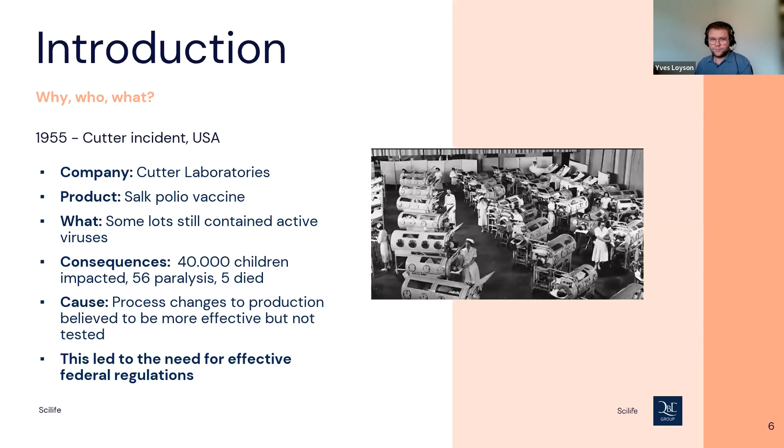What we learn here is that quality control, which is sometimes the outcome of qualification and validation, should be well rationalized, and the maintenance plan is also very important. It's not really a part of qualification, but it will be checked during the IQ phase of our validation approach that the maintenance plan is in place.

If we have a closer look at why we do qualification and validation, we do it to be sure about a more positive qualitative outcome for our products, to reduce the amount of discrepancies, and, maybe interesting as well, it will reduce the cost of production and manufacturing.

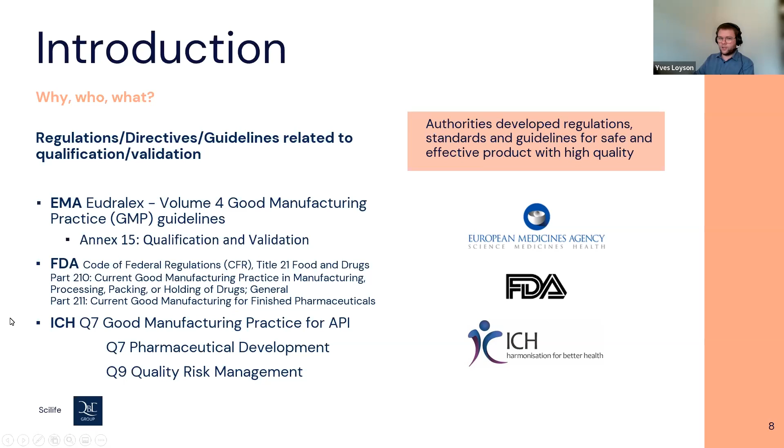When we have a closer look at the definitions given by the EMA, and later by the ICH guidelines, there will be a lot of similarities. For qualification, the EMA states that qualification of equipment, facilities, utilities, and systems should consider all stages from initial development of the user requirements through the end of use of the equipment, facility, and so on.

So qualification is really a life cycle approach. We have to requalify it every couple of times, and even at the end, when you retire an equipment, facility, or system, you have to include some steps like end calibration, good documentation, putting the documents into the archive, and so on.

The definition of process validation, according to the EMA, is documented evidence that the process, operated within established parameters, can perform effectively and reproducibly to produce a medicinal product. So here, once again, process validation is a life cycle approach, and it will be documented that all tests are passed and all rationales are documented, because what is not written down didn't happen.

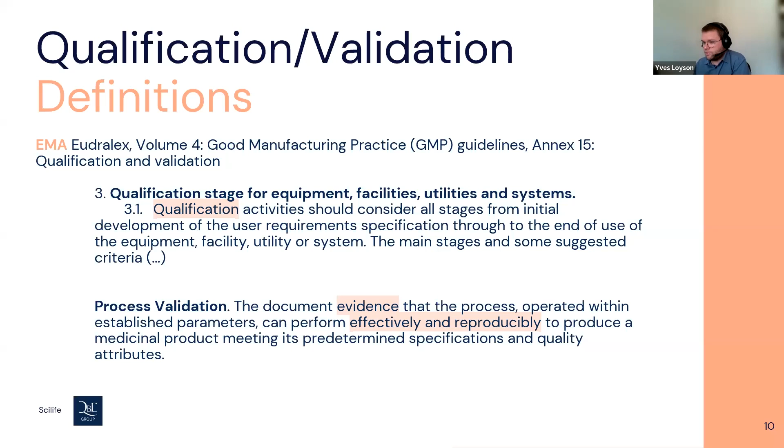The ICH Q7, one of the guidelines of the International Conference on Harmonization, says that qualification is the action of proving and documenting that equipment or ancillary systems are properly installed, work correctly, and actually lead to the expected results. So here, once again, documenting is a very important step, and we have to test all qualification and validation steps against predefined acceptance criteria, according to the expected result.

If we take a larger system, like a filling line, for instance, we can qualify washers, the drying heat tunnels, and the filling lines. But the qualification of every separate part will not conclude in a complete validation. So qualification is a part of validation, but it does not constitute the whole process validation.

The last definition of today: validation according to the ICH is a documented program that provides a high degree of assurance that a specific process, method, or system will consistently produce a result meeting predetermined acceptance criteria. Once more, documentation is very important. The acceptance criteria have to be predetermined based on knowledge and risk assessments.

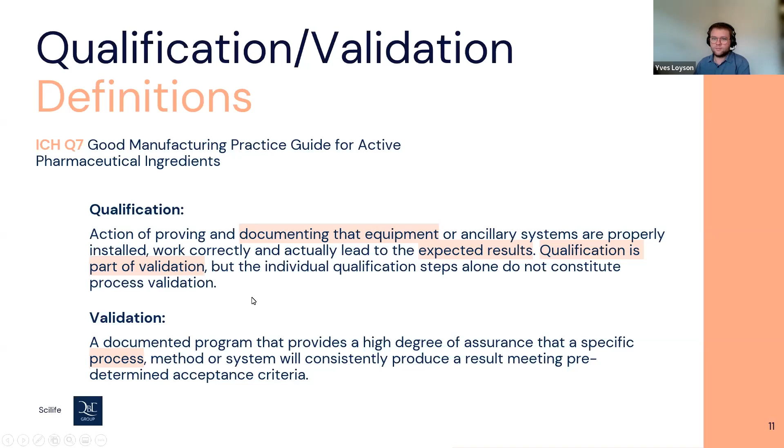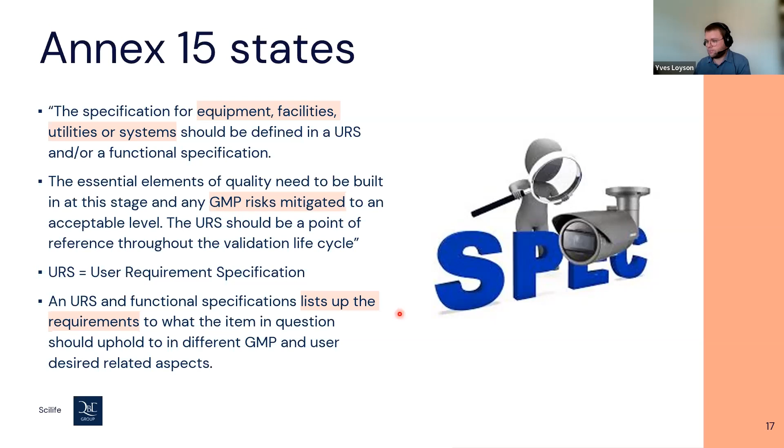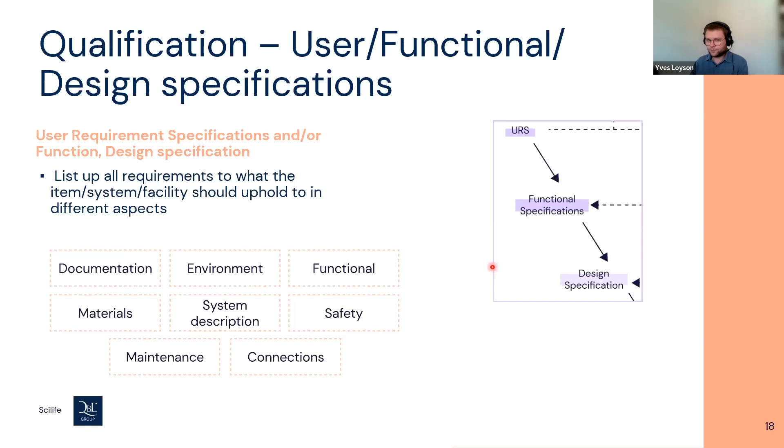If you write the URS, like said, we have to make the distinction between the GXP and the user desired specifications. We can add as well some other, maybe business controlled requirements, some ASH requirements to the URS. You can be free in that. When something is addressed as GXP, so it's really necessary for the legislations, but as well for the good functionality of your equipment, of your site, these requirements shall be tested in the qualification phase, so during the IQ, OQ, and PQ. The other requirements which are listed are not necessary to be tested during the IQ, OQ, and PQ phase, but will be tested during the commissioning phase.

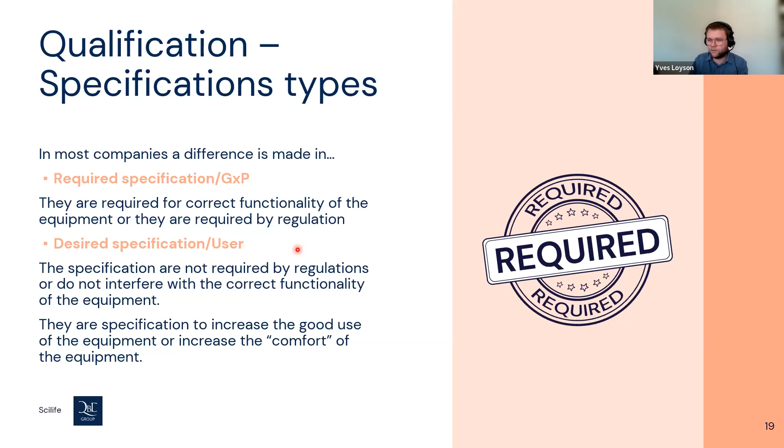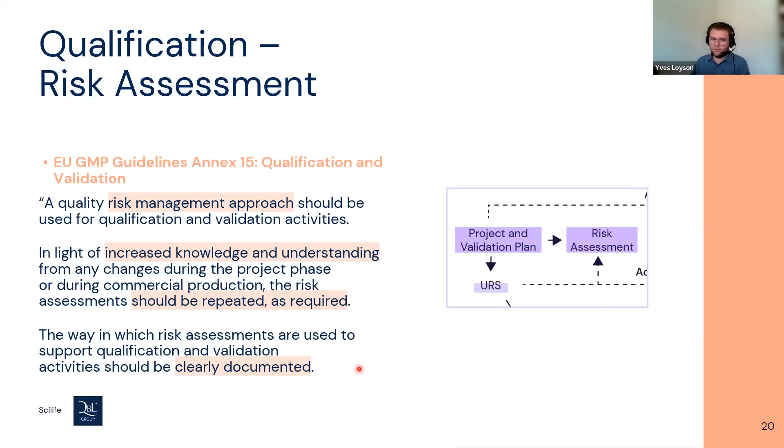Overall, we're going a bit back in the V model. That's once again in the top left corner. The whole V model is based on the risk assessment. So it's a risk assessment, which means it's a living document. In the beginning of the project or your equipment, maybe you don't have all the knowledge with it, but you can perform a risk assessment, of course. After a couple of years, your knowledge is increased and you have to redo the risk assessment. Maybe based on that risk assessment, you have to add a couple of new specifications in your URS, or maybe remove some. Like everything, it should be clearly documented.

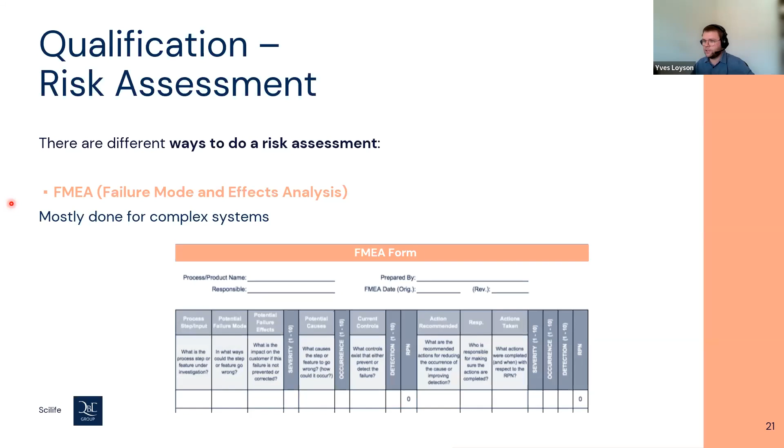We have a couple of ways to perform a risk assessment. The FMEA is one for a complex system, where we address every possible failure with probability, severity, and detectability. Another way to split up your system is the system level impact assessment and the component level impact assessment.

Based on a couple of questions, we will assess the whole system if it's GXP critical, and if you have a GXP critical system, that system can be broken down into several components, and there's a list of questions for a component level impact assessment as well. Those components can be assessed as well if they are GXP critical within the system, yes or no. The GXP critical systems will be included and involved in the whole qualification program.

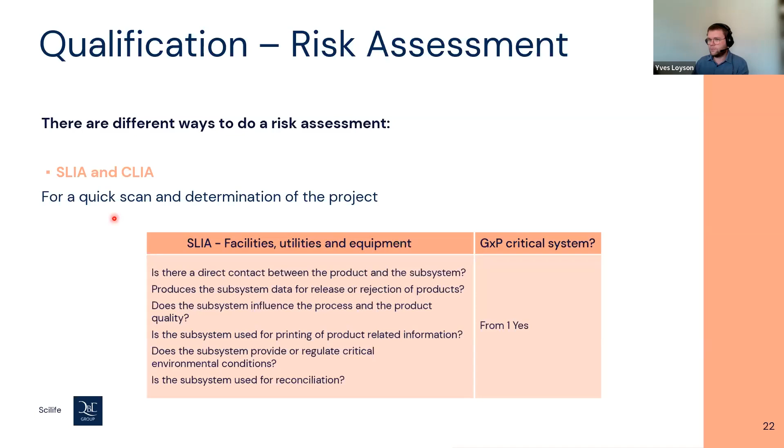Please be aware, if there is a change in your equipment or even a big change in the site, you have to revise your impact assessment or risk assessment. And it can have an impact on the URS, and it can have an impact on the qualification tests which were performed in the past and which will be performed in the future.

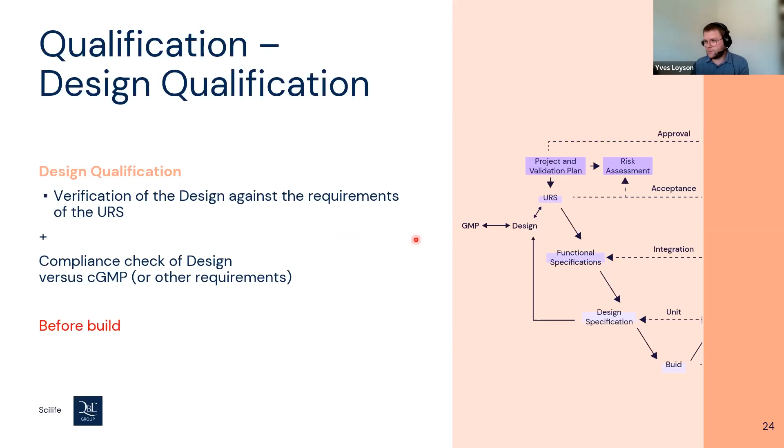As conclusion of the left part of the V model, so the planning and design part, be aware the equipment or the system that we want to purchase is not yet built. We can perform a design qualification. During the design qualification, we will check the design which is supplied by the vendor towards the URS that we've created and towards all the GMP or other legislations. Afterwards, after this design qualification, we can state, okay, this is the required design and we can build the equipment. Is this always necessary to do? I think for the most complex systems, yes, but for a simple off-the-shelf system, it's not necessary.

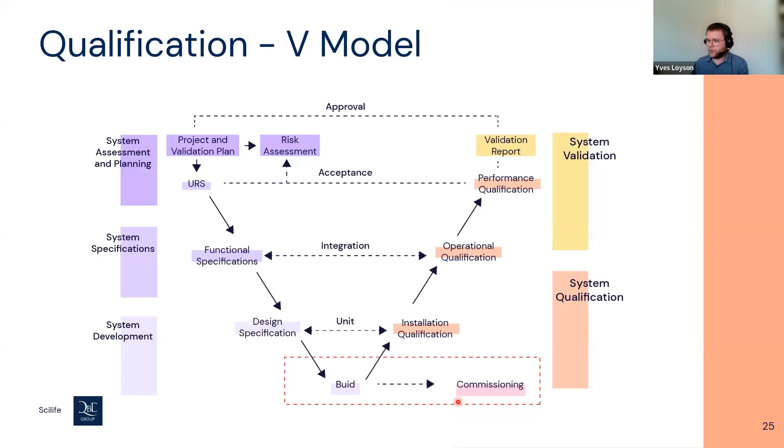The second part of the V model is at the bottom of the V, where the equipment is built and where we will execute some commissioning phases. The commissioning can exist out of two phases. We have the factory acceptance test, the FAT, and the site acceptance test, the SAT. The factory acceptance test is executed at the supplier, and it's documented evidence that the equipment will function as it is ordered. You will test the GXP requirements, but you will test as well all the user requirements as is.

Afterwards, if this is accepted, they will move the equipment to your site, your company, and a site acceptance test can be performed. Some tests can be leveraged between the factory acceptance test and the site acceptance test. If you know that transport will not have an impact on that, or maybe it's a documentation check, you can just leverage the result of that. So we have the factory acceptance test for critical and non-critical requirements at the supplier site, and the site acceptance test on the site of your company.

Maybe important: during the FAT and SAT stage, the deviations or failures that you see and evaluate do not necessarily lead to deviation or change control. That's for the next phase, during the qualification stage. However, it will when you see it's such a big error that you have to rewrite or change your URS. If you change the URS, always make sure it's rationalized as well.

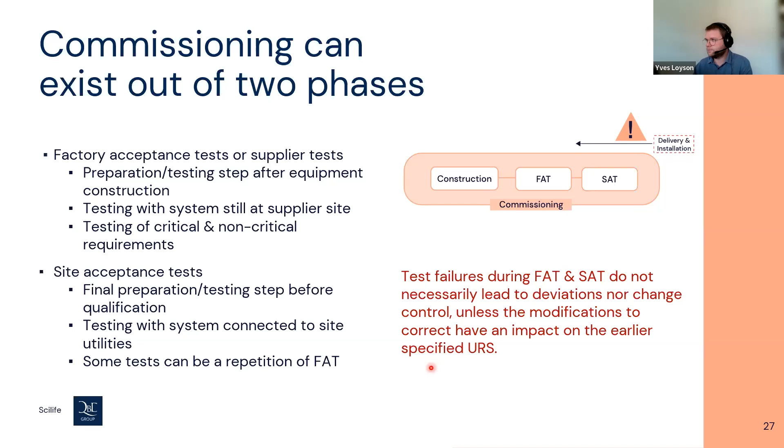For the commissioning phase, we have a little slide now. The Annex 15 of the EMEA states that for complex technology it can be required, so it's not a must-have. And it should be done before the qualification phase and the installation. Like I said, a FAT can be executed at the supplier and can be followed by a SAT on the site itself. Maybe you can leverage some results from the FAT and the SAT into the next phase, like the IQ and OQ phase. But please be aware that if this is the case, it should be well documented, and you should be sure that it's not affected by the transport and installation on the site.

So if you want to leverage some FAT or SAT tests, it's a good practice to include it already in a validation plan, to make an evaluation of all tests which are performed and write it up front in the plan of your validation program, saying, okay, we will perform this test in the FAT or this test in the SAT. And if these tests are passed, they will not be impacted by installation and transport and can be used during the IQ and OQ phase of the qualification. I would write it down in the IQ and OQ as well and put it in attachment so QA can see during the review of the IQ and OQ reports that everything is fine and according to the wishes.

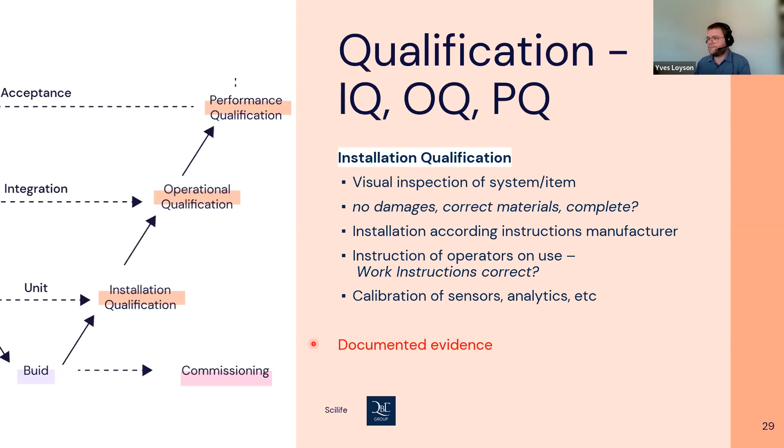Afterwards, after installation qualification, we can go to the operational qualification. In operational qualification, we can already put the power on the equipment and we'll test each function or system, each item of the system, that it works correctly within the specifications. So if you have a vessel with a mixer head inside, does the mixer turn at the specified settings? Okay, you can check that. You can do it at the minimum setting, at the maximum settings, somewhere in between, and cover the whole range.

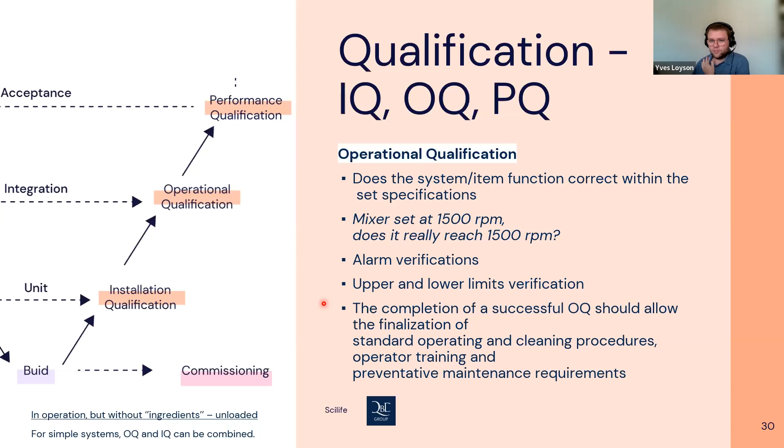We should check as well the alarm verification. So will it trigger an alarm if the parameter is outside its settings? And this can be done for the whole equipment. So during the operational qualification, we want to check actually that the system functions as it is designed within the whole range. It should be documented as well, so we have to write a protocol before OQ. It can be combined with the IQ if wanted, but you should write a protocol before executing the tests.

The last step in the V-model qualification is the performance qualification. So actually, here we will check the reproducibility. We will check it a couple of times with ingredients, with a load and the operation settings. So not the whole range of the equipment, but we'll use the operation settings for this one. Normally, the PQ should be started after successful IQ and OQ. It could be in parallel, but it should be rationalized.

It's good that you have a release note for the IQ, OQ to start PQ, where you rationalize, okay, we did the installation and operational qualification with this and this deficiency or error, but this will have no impact on the further continuation of the performance qualification. So we can continue. So it can be done after the IOQ phase when they're still not completely passed.

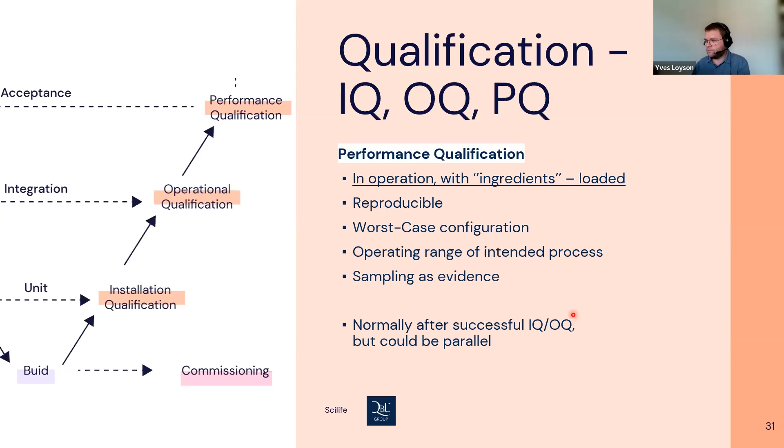At the whole end, we have a validation report. We have written for every stage a protocol. We executed the tests. We gathered the results. All tests have passed if we're lucky. If there are some failures, we have to write down in the report what the failures are, write down the discrepancies, the actions that we have taken. We do the tests to conclude that the validation is completed and successful. So the validation report has to summarize all tests, all acceptance criteria, all test results, and if any deviation occurred, a full investigation has to be applied.

Additionally, it's a good practice, but not obligatory. Between the different stages like IQ, OQ, and PQ, it's good practice to write down intermediate reports to state, okay, we've performed the tests, and we can go to the next phase. Issues that do not hinder the start of the next phase can be taken into the next phase, like maybe a documentation check which failed. You can go on to the next phase without that documentation check, and you can check it properly in the next phase as well.

At the end, a final report has to be written for all validations and qualifications which are performed, like if you have a whole qualification program, and every system has its own qualification report. We will have to write a summary of all qualifications which are done in the project, and in that summary we'll have the conclusion that all results are okay and that qualification was completed.

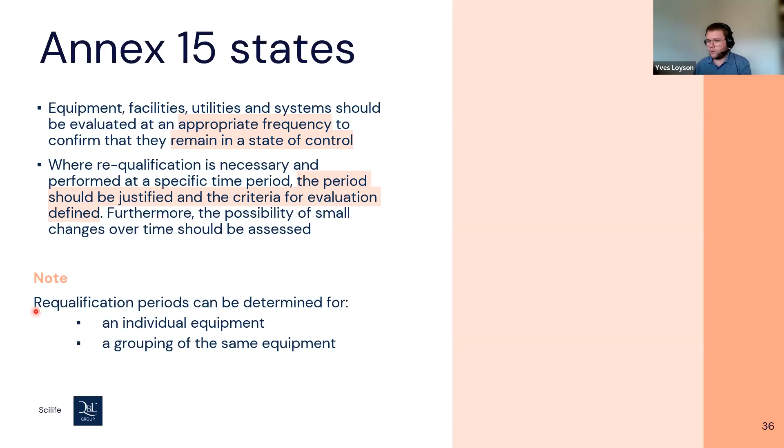At what periods do we have to perform the requalification? Normally, like in the past, a lot of people only did the requalification once a year, but actually, like a lot of things, it's risk-based.

We have to be aware of the consequences of the equipment or process that we use. For sterility or sterile processes, you can do a media fill every half a year to decrease the risk of the outcome. So based on the severity and the potential of failure, you can assess it and state that for this type of equipment, we'll do the requalification once a year, more times a year, or even only once every 2-3 years.

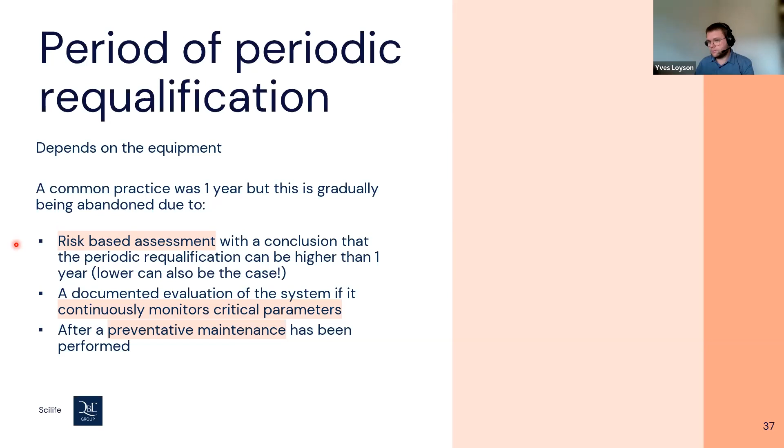Does the whole entire qualification need to be repeated? Like I said, it's not the case. Please be sure, though, that if a big change appears on the equipment or the system, it will have to go through change control and be assessed, and maybe a new qualification of the entire system must be performed, not only a requalification.

That was it about the V model and the qualification. We have a couple of minutes left, and I will go through process validation. As we saw in the definitions of the ICH, we can qualify every system separately, but the qualification will not lead to validation of the whole process or whole system on its own.

It can be seen here in the little timeline. First we have design, development, qualification, and afterwards, after all qualifications, we can perform the process validation. So the qualification is linked to the equipment. For me, process validation is linked to the process, the system, and will be tested on the product.

Some definitions about process validation: it's once again very documented evidence that the process will be effectively and reproducibly produce its medicinal product towards the predefined acceptance criteria and quality attributes.

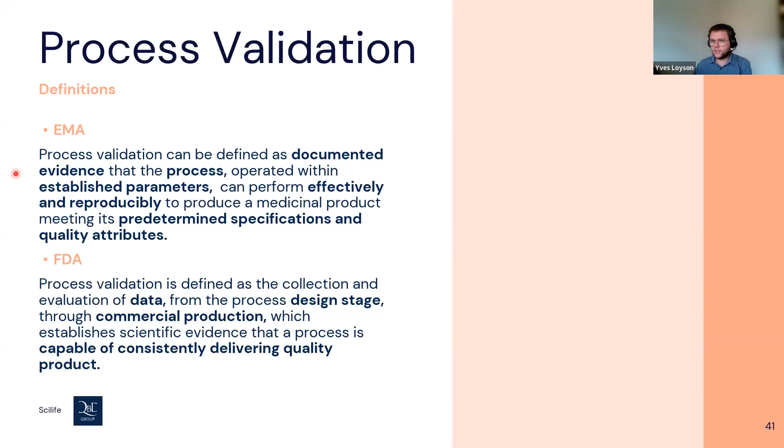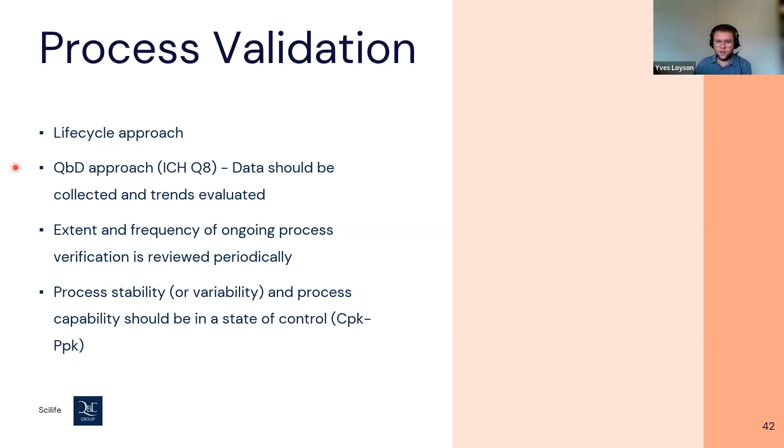So yeah, it's a life cycle approach. You can use the QbD approach, so a lot of data should be collected for that. The manufacturer process is no longer a black box - we know in detail what is happening during the process, and we know for every parameter what impact it will have on the outcome of the process as well.

If we have a little look at the approach which can be followed during qualification, I referred more to the EMA Annex 15 for process validation. I can also refer to the FDA guidance on process validation, written in 2011. There they defined 3 stages: first the process design, then the real process qualification, and afterwards, after the process is validated, we need a continued process verification step as well.

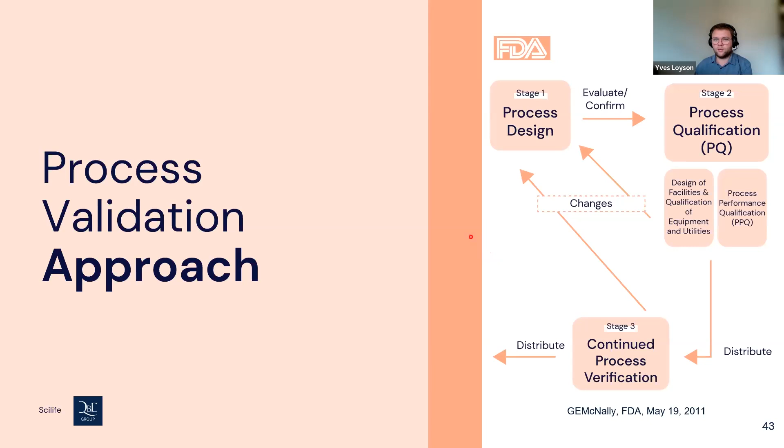During the process design, we want to really understand the process which is happening, and we want to create and set all limits of all parameters and all CQAs that have to be tested during qualification, but as well during release, and maybe continued process verification in stage 3 of the process validation step.

After the system or process is fixed, we can perform stage 2, the process qualification step. In stage 2, we have two parts. First of all, we check the prerequisites - is the whole facility, all the equipment qualified, all trainings performed, all processes and procedures in place? Do we have method validation? Is computer system validation fine, and so on? So we have to check all prerequisites.

And afterwards, we will perform the PPQ tests, the process performance qualification, where we will repeatedly run a number of batches to prove that the normal operating ranges consistently produce the product that we want.

At the end, in stage 3, there's continued process verification. Between stage 2 and stage 3, the process is fixed and validated, approved by the authorities, and it's on the market, so it's in routine. Even then, we have to add more controls and evaluate all the results during the continued process verification stage. We have to write a process control strategy for that, so every batch during routine can be checked once more.

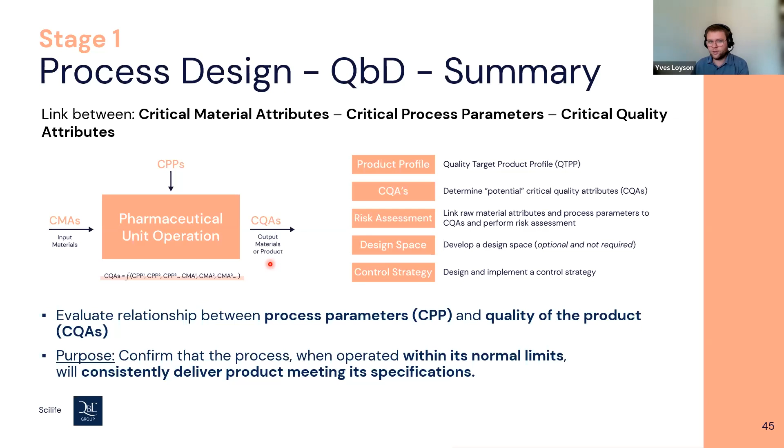In stage 2, like I said, we have 2 parts. First, check the prerequisites and do the qualification of equipment, systems, and utilities. In the second part, we can perform the qualification of the whole process and prove that our process is within control.

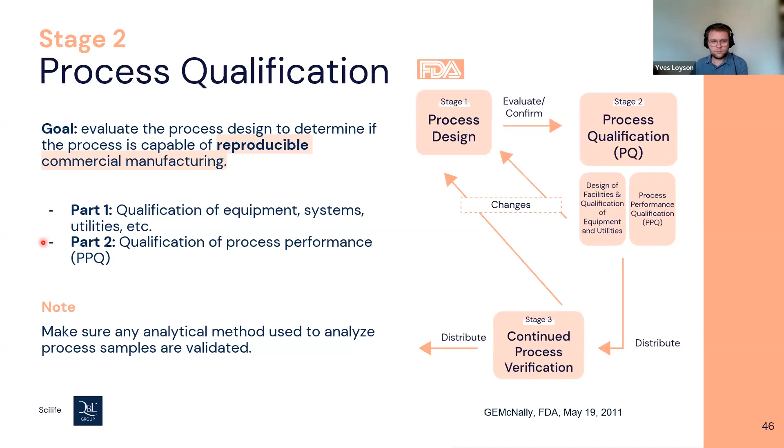Like we said, and saw in the definitions, it's documented evidence that we have to create. So like in qualification, where we had to write a protocol every time, even here during process validation, we need a protocol, a plan of how to do it, and the links between each step. The protocol will include all the parameters listed, state which sampling is needed, and define the acceptance criteria.

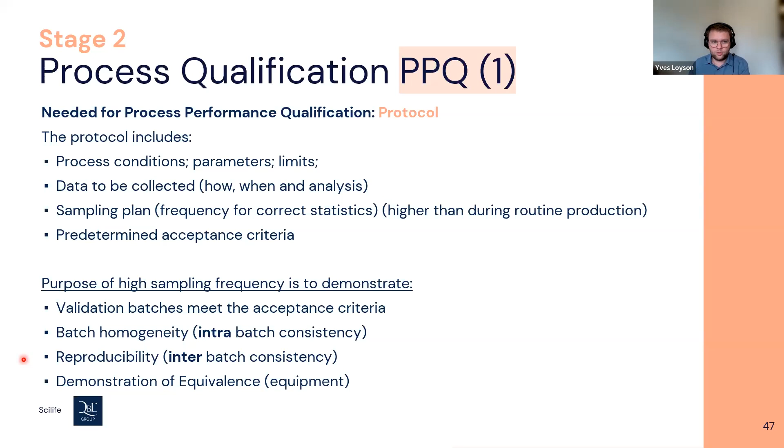So if you do it, at the end we want to state that the validation batches meet their acceptance criteria, but we have to evaluate the batch homogeneity as well - intra-batch, but also reproducibility. So we have to perform a statistical evaluation between batch 1, 2, 3, 4, 5 during the validation of our system, our process.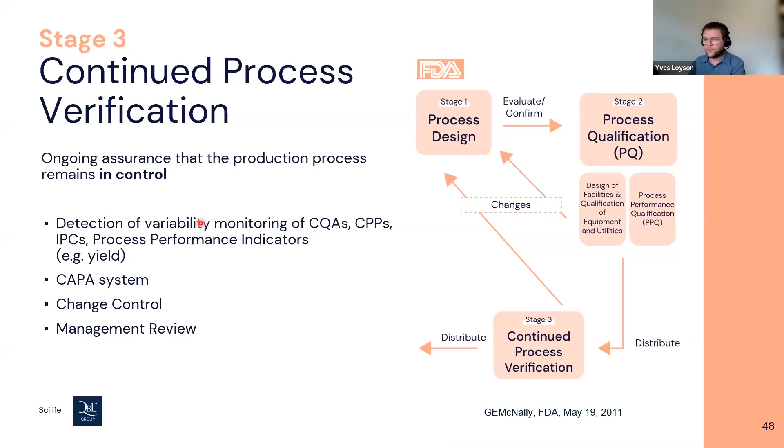Okay, we have another one from Camila. She says: could you please repeat the name of the second possible validation scheme? Oh yeah, I've written it down, so I'll go back to my slide for that. We have the V model, which is addressed in Annex 15 of the EMA, but we have as well the ASTM E2500 guideline. Maybe I should post or copy it in the chat, or maybe we can include it in the info we send afterwards.

That's another one from Camila: would it be possible to obtain a line list of differences between those two strategies? Well, maybe not now. I said the main difference was the verification phase. In the V model we have the rigid model, like IQ, OQ, then PQ, and first the FAT, the SAT. But in the ASTM model it's just one phase, called verification on its own, so it's more flexible in which step you do what, and it's linked with the risks of each component of your verification of your system.

Okay, good, thanks. Philip is asking: what is the difference between PQ and PV? The PQ, performance qualification, for me is still part of equipment qualification, so you focus on your equipment, that it's working. PV stands for process validation, and that's the validation of your whole process, your whole system, focused on the product, your cleaning, or your sterilization. For instance, for sterilization during PQ you test your equipment, your autoclave or something like that, and you test all temperatures, whether the temperature is distributed homogeneously, and check sterility with indicators in a full load, minimum load. But during PV, you check your product too—is it still stable, you can put it on stability studies, and is your product sterile, not just the indicators. So PV is more linked with the product, and PQ with the equipment.